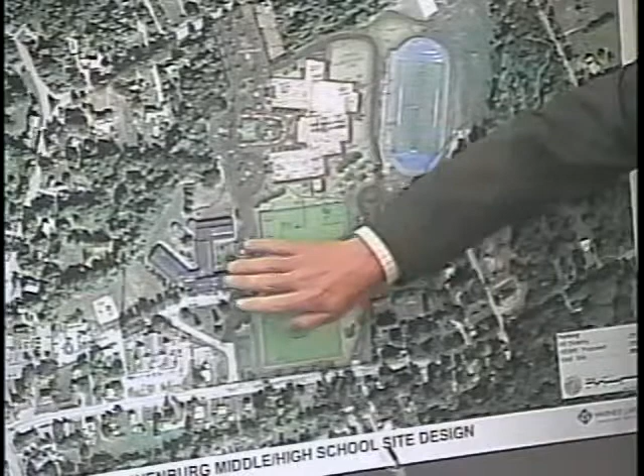So this board right here shows the overall context of the site, and then I have an enlargement that's going to be a lot easier for people to see the actual design. But Mass Ave is located at the bottom of the sheet here. North is up. This is the Turkey Hill Middle School and the Passios School building. And the existing high school building is dashed in a dark outline right here. This project is a phased project where the new school will be built on the upper level athletic fields while the existing school is in operation. And then when this building is complete, the students will move into the new building. The existing building will be torn down and the ball fields will be constructed down here.

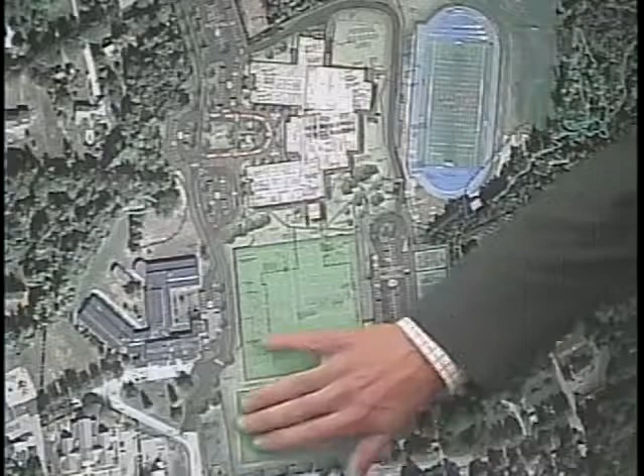In the earliest phase of the project, we'll be recreating about 2/3 of this field down here to offset some of the displaced athletic field space that the new building is taking up.

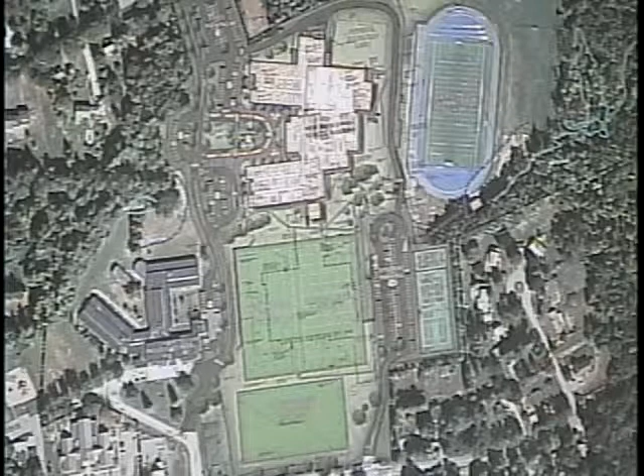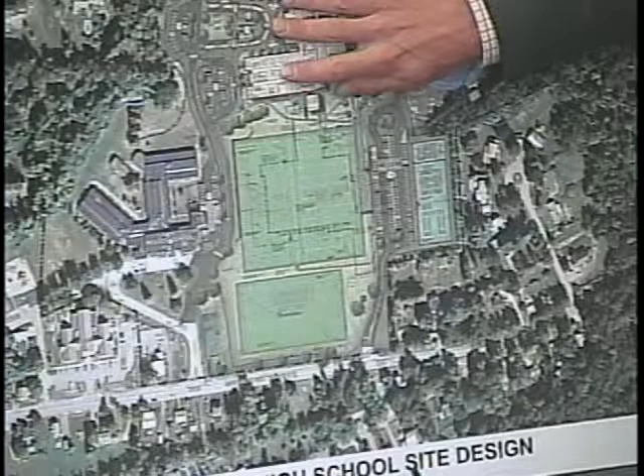So as far as traffic circulation is concerned, we have this existing driveway entrance that will be serving as the main drive for the new high school, middle school building. We're connecting it all the way through the site to a new driveway entrance on Oak Avenue, and that will serve all of the drop-off and pickup on the west side of the new building.

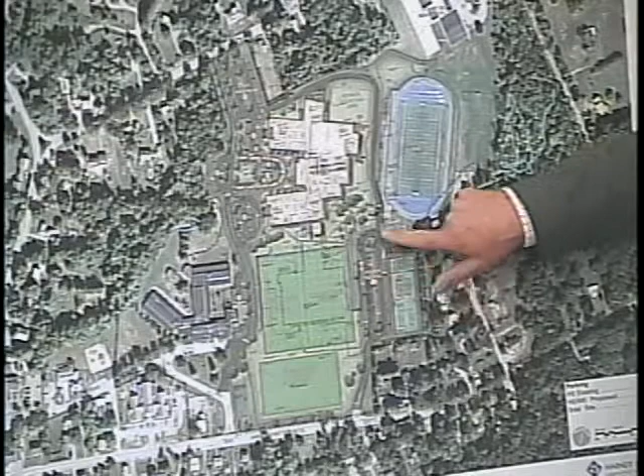The student parking lot is going to be regraded, but it's going to remain in its existing location. And the driveway entrance off of Mass Ave will also remain as it exists today. We have changed this end of the parking lot to act as a drop-off zone for sporting events. And the design in this area is designed... Well, let me move over to the larger plan because that will be easier to see.

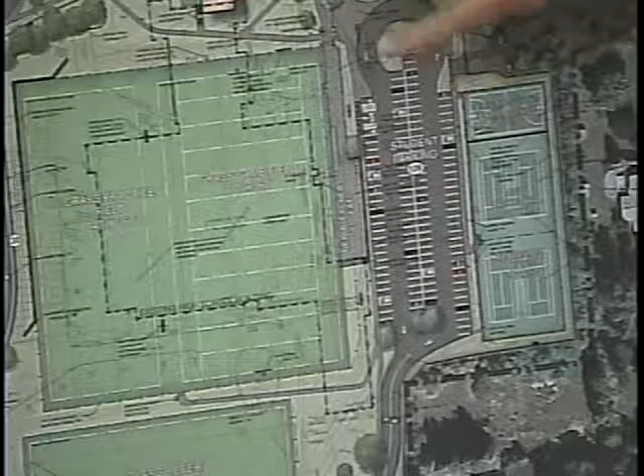So here's where I was looking at in the previous plan. It's designed to maintain the existing concession building and Grove there and Memorial. And this area is going to serve as, like I said, the athletic entrance, but it also is where the students will be arriving, parking and being able to access the front of the school up this way. We have the parent drop-off loop here and the bus loop located here.

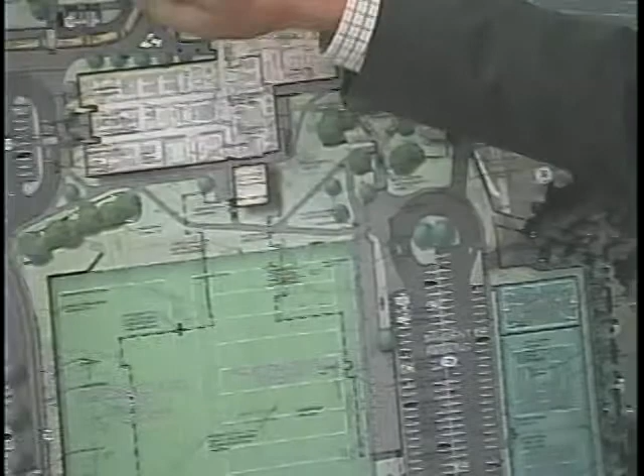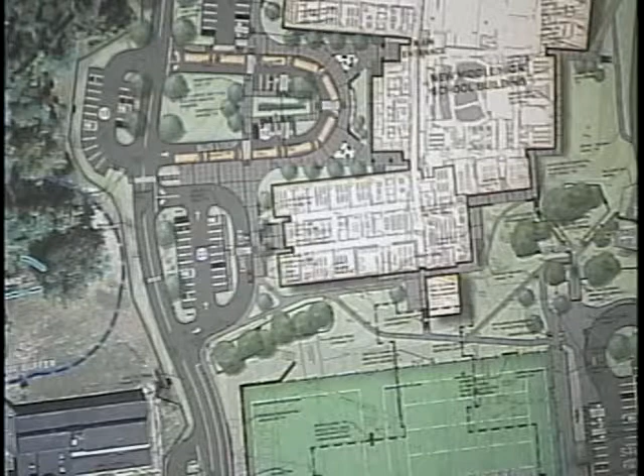One of the comments that came up in the tech meeting was concerns associated with the amount of queuing that would occur at this drop-off loop. So in response to suggestions that were made at that meeting, we have widened the driveway from here back to where it already is greater than 32 feet in width to be able to have a dedicated queuing lane while still having two-way traffic in that location. And that was a concern that was brought up by public safety officials in town, so that when cars are queued up along the curb here, there would be no concern about being able to get emergency vehicles up to the front of the school building.

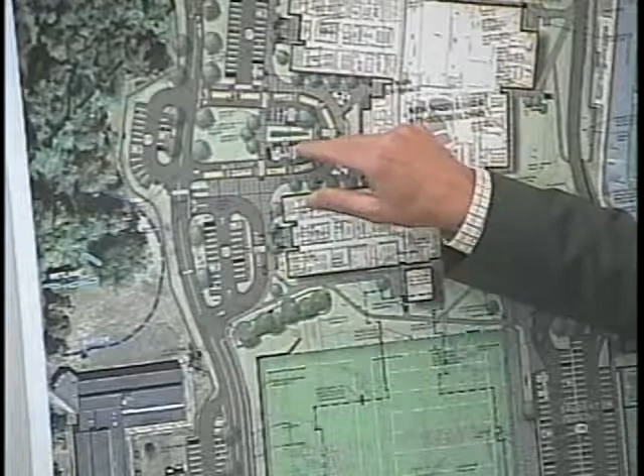Of course, we also have this new entrance up here as well, and that will provide a second means into the site. And also we have this third access point that's going to be maintained to the student parking lot. That connects to a new fire lane, emergency access drive, that will circumnavigate the building.

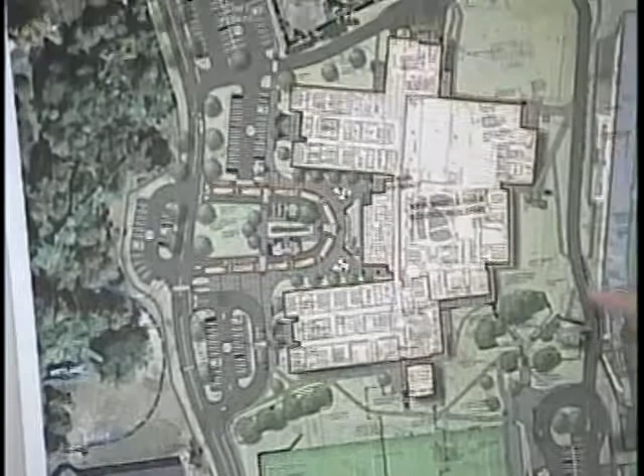I think with the traffic management summary that has been performed as a result of this review, there was also an analysis of safe sight distances off-site. And this driveway intersection checks out fine. This driveway intersection is on a flat, straight area, and that checks out fine. This driveway here, because the speed limit is not posted right now, and the police chief has described the speed limit along here as 30 miles per hour because it's a thickly settled area, the recommendations from our traffic engineer are to post that speed limit in advance of this intersection so that the speed of vehicles traveling in that area can be enforced to that speed limit.

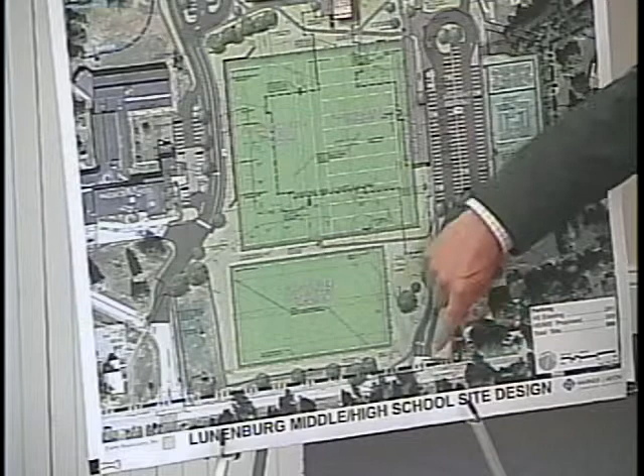There's also some vegetation clearing in this location and possibly some pavement markings to keep the vehicles away from the curb line and out in the travel lane. And when those recommendations are implemented off-site, this stopping distance at this intersection is also acceptable. So we understand that the town has their own program for doing traffic improvements off-site, so those are not incorporated into the high school design, but they need to be implemented as part of the recommendations.

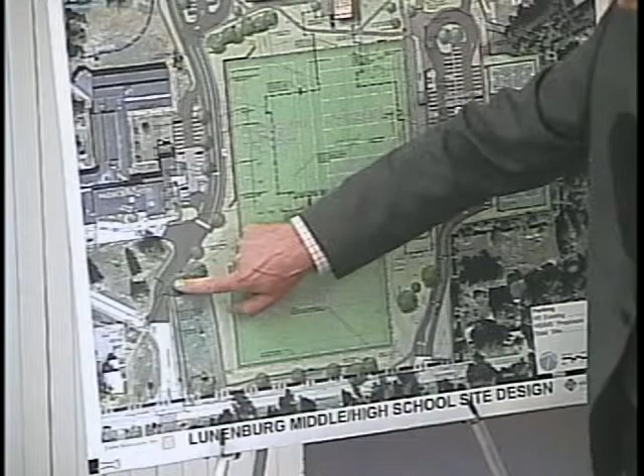The on-site traffic recommendations were to do just this, what I described a minute ago, in terms of allowing adequate queuing distance for vehicles when parents are coming in here in the afternoon, and live parking along here to pick up their children. I think those were some of the most substantive comments from the town with regards to the review. There were a lot of detailed comments from the engineering review with regard to the drainage design and just getting on the same page, I think. And what I'd like to do is see if there are any questions from your board that we can address here tonight.

And what we're really asking for with regard to this review process, because of the time frame associated with this project now, with the construction manager basically bidding out the work and needing to start construction in some of the early phases, constructing this field and starting the foundation work for the building, is to see if you would be willing to consider conditional acceptance of what's been submitted and presented, conditional on your reviewing engineer being satisfied with the response.

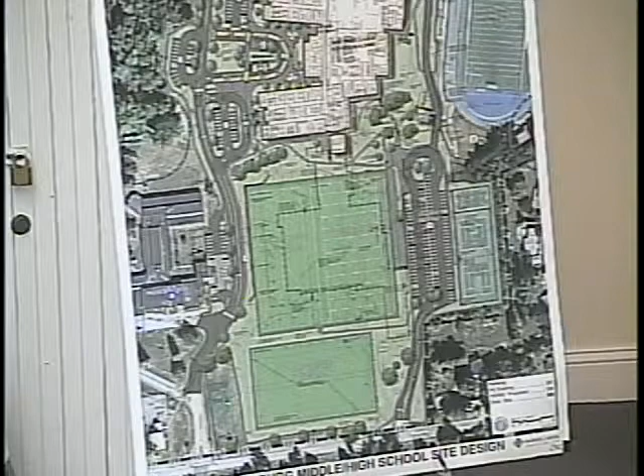66 and 67 in regards to the wetlands on the site. Just asked that the wetlands report be submitted to take a look at, and we recommended what they call a notice of resource area delineation or request for determination be submitted to the Conservation Commission to verify the wetland delineation. Based on discussion, I believe they had noted that they had gone over that with the ConsCom's agent. So we just bring it up as a suggestion that they might want to look into that, and it sounds like they may have.

98 is in regards to the sight distance, which was discussed. So again, the east exit, which is the right exit, that goes directly to the student parking area. According to their traffic assessment, it doesn't meet the sight distance as you're exiting. And they also mentioned in their traffic memo that the conditions may actually be worse than calculated because the actual observed speeds are potentially higher than what's posted. So even more of a potential issue.

And then we also note that now you're going to have a left and a right-hand turn coming out of that, which can make it even more difficult to see if you're trying to look left and right and you have another car next to you, to even more exacerbate that potential sight distance issue. And also with a student parking lot, it's going to be mostly students coming in and out of there.

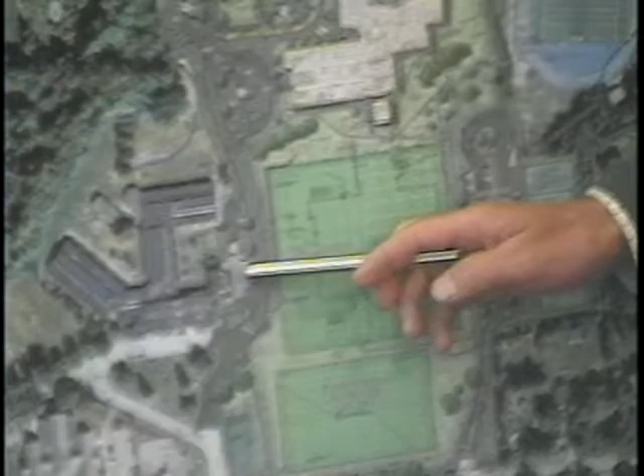That parking is actually designated for the Passios building use. This is not factored into the day-to-day operations of the high school, middle school building. All of the parking for the high school, middle school is satisfied in these lots. So we were creating this lot here in order to satisfy the displaced parking in the main lot between the 2 buildings that is currently supporting the Passios building.

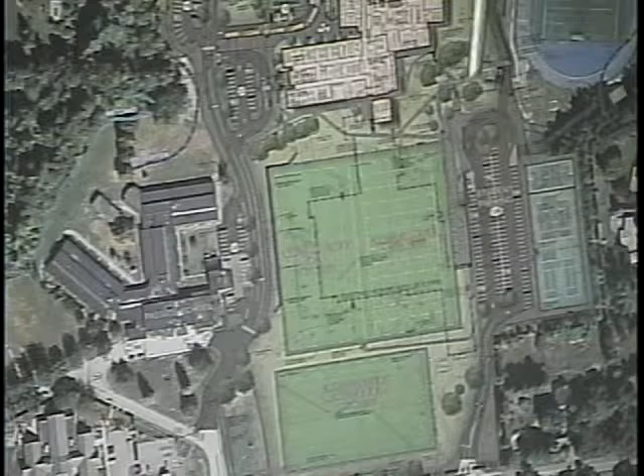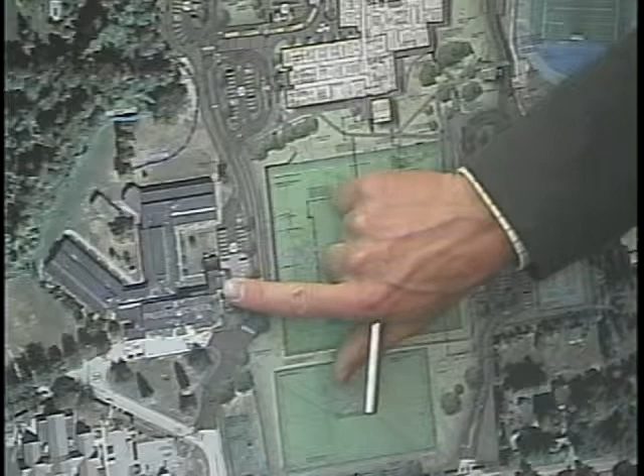So the offset, to get to your question, basically from the edge of the driveway back to the building, if I understand your question correctly, how much yard space that is? Yeah, I guess you're saying that would actually be part of the Passios site. Exactly. And I don't want to rat hole on this issue, but this is kind of a complicated thing, and it came up at our last meeting.

A simple but difficult to answer question came up at our last meeting, which was, what's the nature of that driveway that serves the high school there, that now goes and touches on the Passios parking lot. I assume everybody's familiar that there's a building reuse committee that's considering repurposing the Passios building, and it could be repurposed for educational or other commercial uses. So the future of the Passios building isn't really clear at this point.

But what's going through my head here is, if we want that roadway, or driveway, to be a private drive that's really restricted access for the high school, so that you don't have all kinds of public traffic not related to high school activity going through it.

And that's what's used to access the parking lot in the Passios. That starts to raise some questions, I think, about uses of the Passios building. Right now when I look at this plan, my assumption was that's somehow related to the high school, and I don't know what the ongoing assumption is, maybe for overflow events the high school might use it, but it belongs to the Passios during the day.

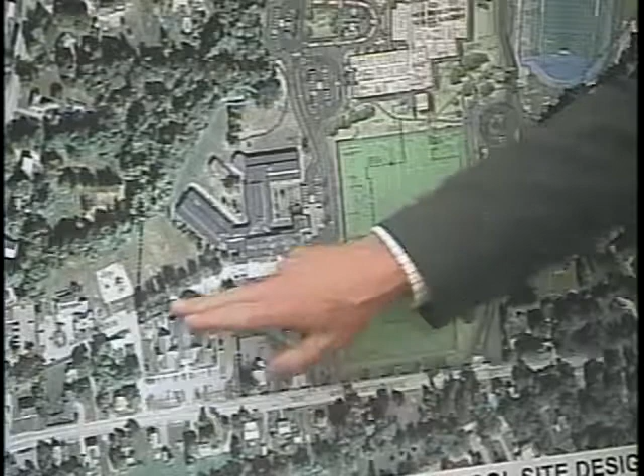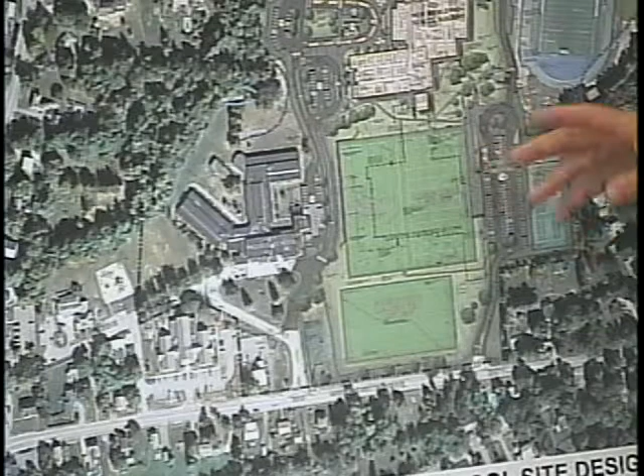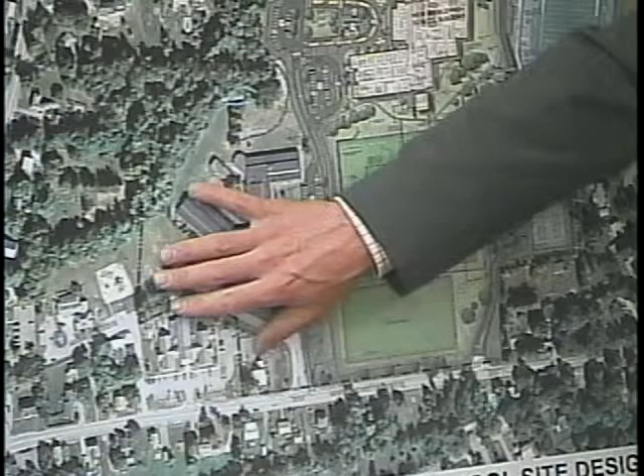If that were a public road, you'd be basically subdividing this parcel and creating a right-of-way through there. Right now, this is all one site. The 3 schools exist on the site, so they're sharing facilities. I might make another point too, in terms of big events at the high school. When you talk about overflow parking, this would certainly be in play for things like homecoming, a big game in the fall. There are enough spaces on this site to satisfy those types of events.

When you take a piece of this out of it, those vehicles that might use those few spaces will need to find a home somewhere else, parallel parking along the driveway or something like that. So in terms of the subdividing, that might require some sort of easement on the new lot to grant the high school permission to use that. Yeah, I think it really comes down to what use this is, and you're in the driver's seat.

Yeah. Right now we don't have a use hammered down. We're going to try and leave that as open as possible, to leave ourselves as many options as possible, because the ultimate goal is to not have to knock it down, and just by not having to knock it down, we save the town $1 million. So the idea is to make that an attractive enough piece of property that someone takes it over and does something with it. I wouldn't want to start throwing easements on it right out of the gate and putting restrictions on it that way.

My intent is to make sure that we make that as marketable a piece of property as possible. Well, that's why I'm bringing this up, because right now, actually, you would need 2 easements.

I mean, if I understand correctly, depending on where you cut the private versus public roadway, the owner of the new Passios lot, if that driveway was on that lot, would need an easement on the high school's driveway to get onto the lot. And then the high school would need an easement on the lot to use it for overflow parking.

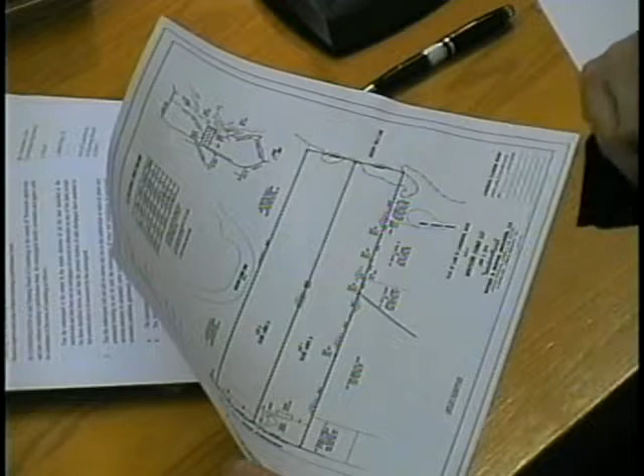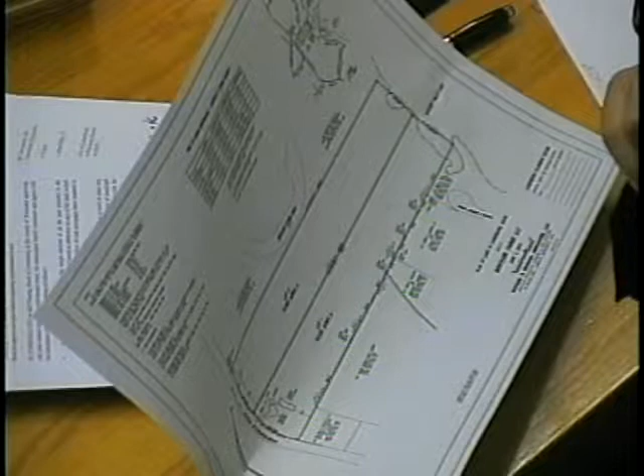You'll note that this is adjacent to the condominium project, Marcus and Flower Drive, just as a point of reference to tell where it is. Do these lots become deeded lots as part of the Hickory Hills Lake Association? No, that's not part of the Hickory Hills Lake Association. So technically, these are lots with lake frontage on a lake they can't use? They in effect have lake frontage, even though, as I said, those property lines existed before the lake was inundated. That's the way it just turns out. There will be lake frontage. So in addition to having lake frontage, they actually have a lake. Yeah, exactly, precisely. They own some of the water.

I forget how far back I had to chase the deeds to figure that out, but as I said, to my interest, I guess is the right word, that back property line existed before the lake did. Quite old lots. Yeah. And just as, again, a point of interest, these were originally two 10-acre lots side by side, but they were in common ownership for so long that, for all practical purposes, they became one tract of land. So they cannot be sold separately anymore without a fresh ANR plan. Okay.

So, I'm not knowledgeable on these things, so I'm going to ask the question. When something like this comes forward, do we not modify the property lines to be in alignment with the lake, or do we accept them the way that it is drawn based upon the history? Well, there's any number of ways to look at it. That back line was in existence before the lake. When the lake was flooded, the line did not magically move. That property line of ownership still existed. And just because it was flooded, that does not mean the ownership magically changed hands.

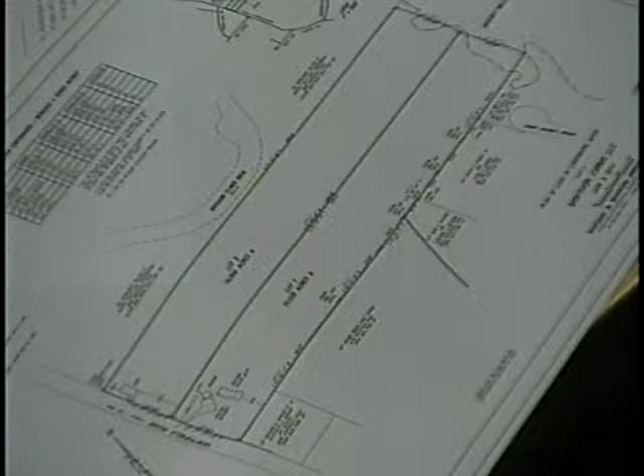Dickinson Reservoir, where he built it so he had a place to land a seaplane. So on this 10 acres, right now, we're just subdividing. Okay, does anybody have any questions for Mr. Preston?

I'm all set. The way it works is we submit this, and then it circulates through all the boards. All the boards will give us their feedback, each department, conservation, the sewer, the police chief, fire, they'll all get a copy of this plan, and then it'll come back to us in 2 weeks. If there's anything wrong, we share that with you. If it's fine, then we sign off on the plan.

So all things being in order, you would anticipate signing it in 2 weeks? In 2 weeks, as long as all the other boards come back. Exactly. And hopefully there'll be enough feedback in advance in case there is something we have to address before then, fingers crossed. Okay, thank you.

We do have a letter. Did you get a copy of the letter from the sewer commission? Yes, I did. In regards to that, they will not extend the sewer to accommodate this property. Right, exactly. Not an issue, because we have designed and presented this to the Board of Health with their approval. The new lot gets a new septic system, and the old one gets a repair of the existing system. So no connection to the town sewer is required.